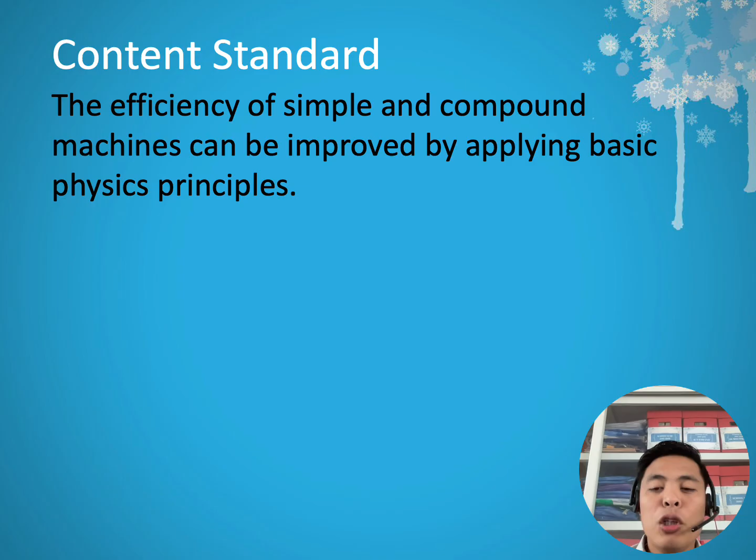This is the content standard of our discussion: the efficiency of simple and compound machines can be improved by applying basic physics principles. Our more technical or sophisticated machines come from the application of basic simple machines. The compound or complex machines we know now are all applications of simple machines.

This is our learning competency. We need to apply the concept of translational and rotational motion. We're still on this topic because simple machines or any other machines, whether complex or compound, have applications of translational and rotational motion. That's why they are working.

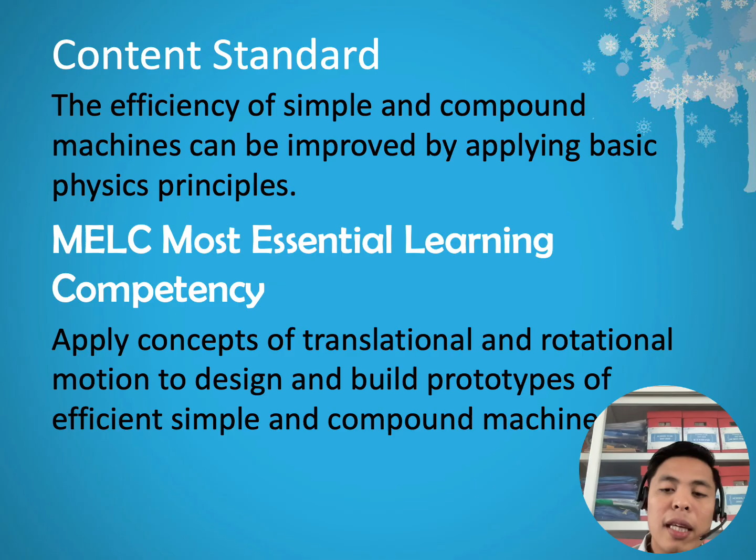These are built as prototypes of efficient simple and compound machines. The basis for making simple or compound machines is based on rotational and translational motions.

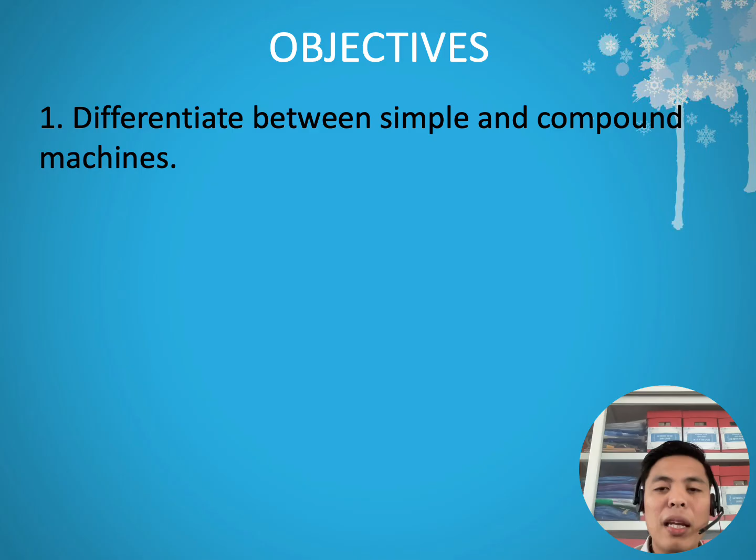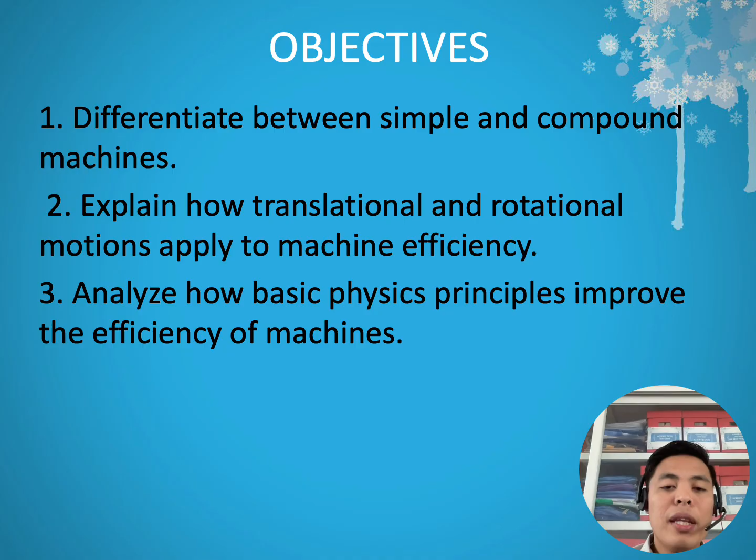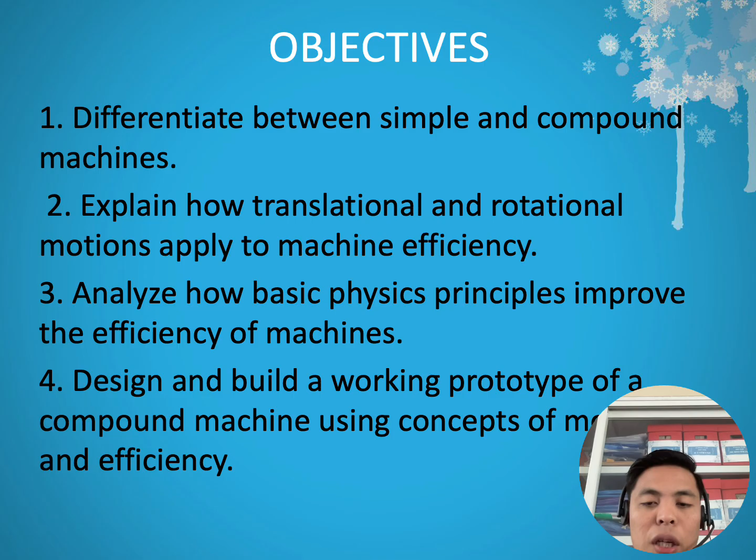For our lesson objectives, we will differentiate between simple and compound machines - what is the difference between these two? We also need to explain how translational and rotational motions apply to machine efficiency, and analyze how basic physics principles improve the efficiency of machines, and design and build a working prototype of a compound machine using the concept of machine and efficiency.

Let's proceed to the definitions of a machine, simple machines, and compound machines. A machine is a tool consisting of one or more parts that is constructed to achieve a particular goal. Take note of this - these are tools with one or more parts that help us do work more easily. So a machine is any equipment or device that helps make our work easier. Instead of using a large amount of force, a machine helps us save effort and time.

For example, we have a bicycle. A bicycle will help us travel faster than walking. That's why a bicycle is considered a compound machine.

A simple machine is a mechanical device that changes the direction or magnitude of a force. Take note, simple machines change the direction or size of a force. Simple machines have a simple design, but they help a lot in doing tasks or work. This doesn't reduce the total work, but it makes applying force easier. For example, we have the ramp, the lever, and the pulley.

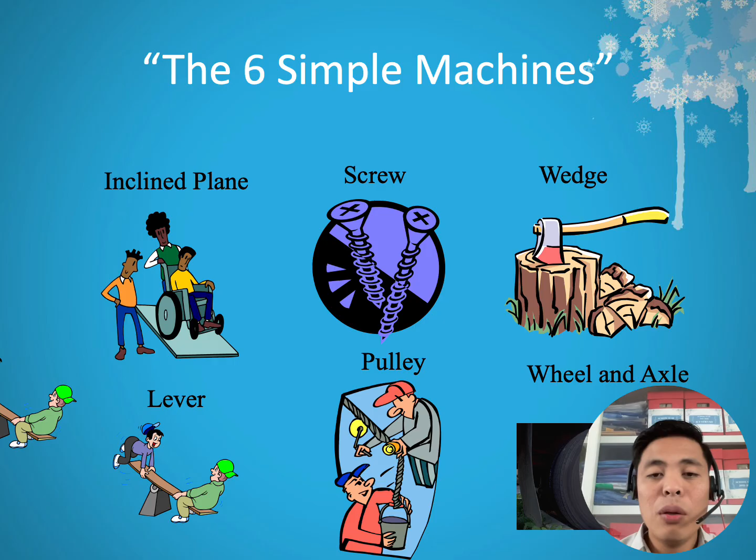Now, let's begin with the first one - we have the inclined plane. An inclined plane is a flat surface that is higher on one end. Take note, it's a flat surface but one side is higher - one end is elevated. An inclined plane makes the work of moving things easier.

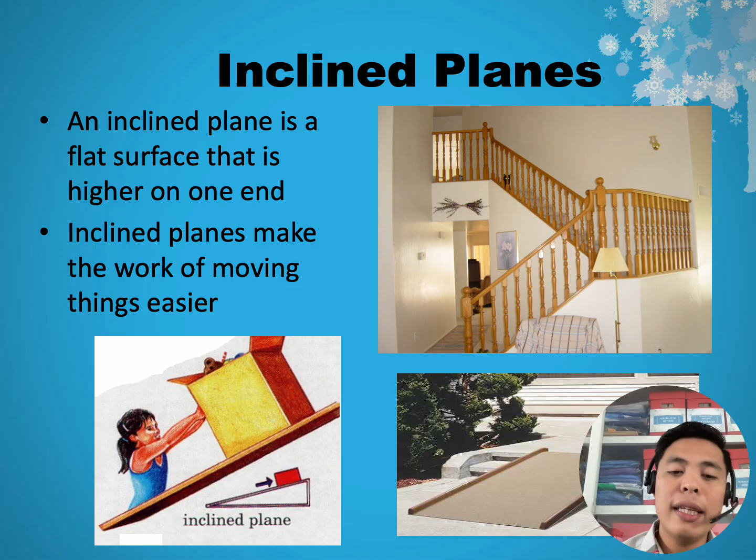So, screw naman, so a screw is a mechanism that converts rotational motion to linear motion. This is an application of rotational and translational motions, and a torque to a linear force. It is one of the six classical simple machines, and the most common form consists of a cylindrical shaft with helical grooves or ridges called threads around the outside.

Now, a screw is an inclined plane wrapped around a cylinder. So kapag iniikot natin ang screw, ang paikot na galaw o yung rotational motion ay nagiging tuwid na galaw, or you call it a linear motion.

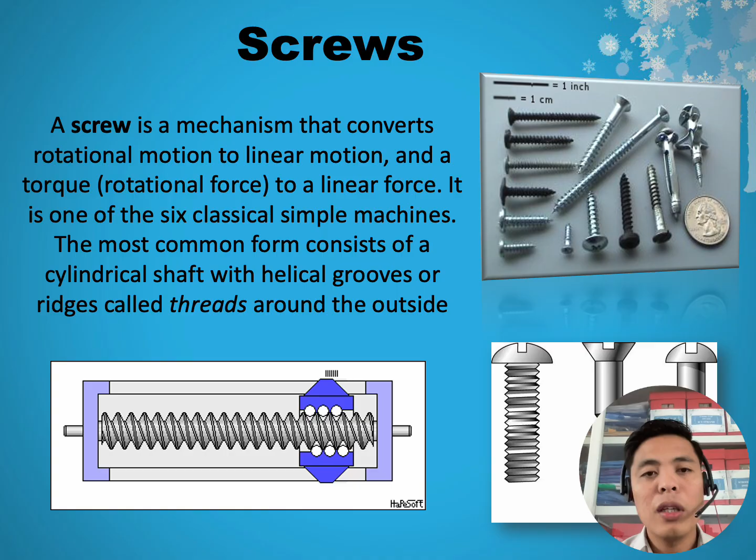For example natin yung light bulb, no? Na-try na natin siguro magpalit ng light bulb. Yung bottle cap, no? Magbubukas tayo ng mga soft drinks, di ba? Meron bottle cap doon, at saka yung mga wood screw. So yun ang mga example natin.

So take note of this. The tighter the threads, the easier it is to generate a strong force. Ibig sabihin, kapag mas maliit ang pagitan ng mga thread ng screw, mas malaki ang mechanical advantage. Ibig sabihin, mas madaling maipapasok ang screw kahit matigas ang material. So ang real life example natin dito, we have the wood screw sa furniture assembly. Kaya ito yung mga ginagamit.

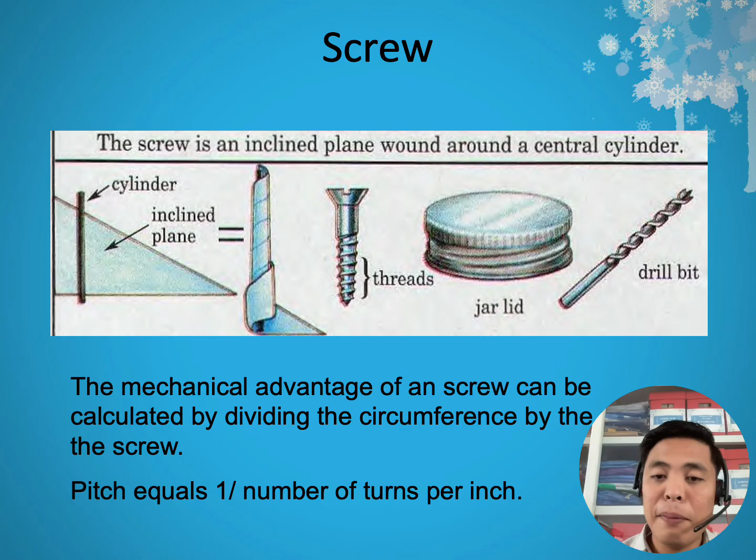Meron din tayong mga wedges or wedge. So, a wedge is what? Sabi dyan, is a triangular shape tool, and a compound and portable inclined plane, and one of the six classical simple machines, and it can be used to separate two objects or portion of an object, lift an object, or hold an object in place.

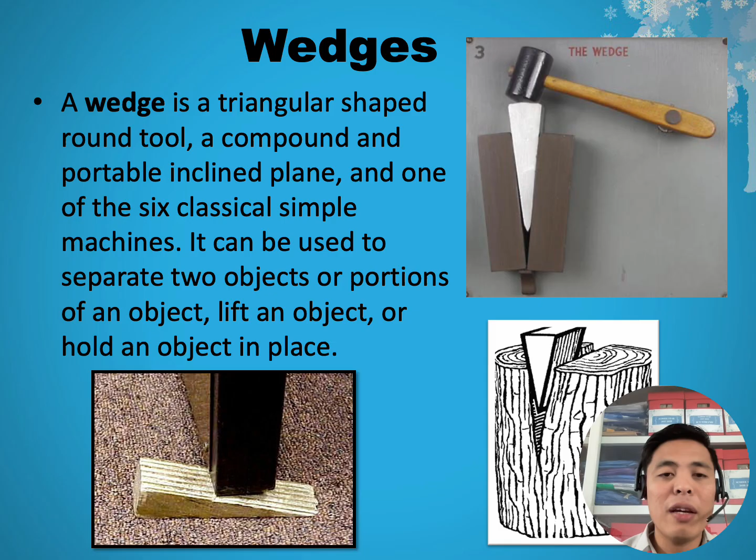Again, ang wedge ay made from two inclined planes joined together. Usually ginagamit ang wedge upang hatiin o kaya putulin o ihiwalay ang mga bagay. Kapag pinukpok ang wedge, ang pwersa ay napupunta doon sa magkabilang gilid. So, for example, yung knife. Ito mga example natin: pwedeng knife, pwedeng we have axe, pwedeng nail. So yun yung mga wedges.

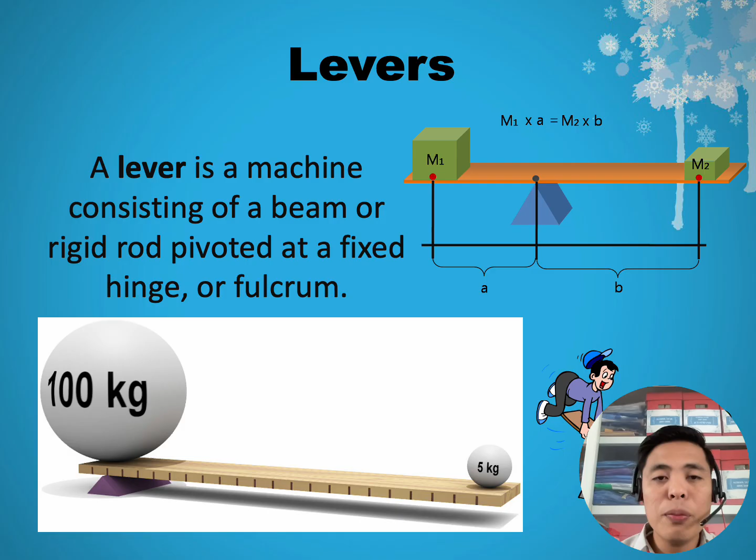Next, let's proceed to the lever. A lever is a machine consisting of a beam or a rigid rod pivoted at a fixed hinge or fulcrum. So ano bang itong lever? This is a rigid bar na rotates around a pivot. Yung pivot, tawag natin doon, is a fulcrum. Ang lever ay nagpaparami ng puwersa, technically upang mas madaling mabuhat o maigalaw ang isang bagay. So ang mga parts ng lever natin: meron tayong tinatawag na fulcrum, meron tayong effort, at meron tayong tinatawag na load.

Ngayon, pag-usapan natin yung mga iba't ibang levers. Levers are classified based on the position of the fulcrum, the effort, and the load. Di ba ito yung sinabi ko sa inyo kanina, na ang lever ay merong tatlong parts: meron siyang fulcrum, meron siyang effort, at meron siyang load. Nagkakaiba-iba lamang yung mga levers. So, there are different types of levers, nagkakaiba-iba lang sila based doon sa location ng fulcrum, ng load, at ng effort. Saan ba nakalagay? Saan ba yung location ng fulcrum? Saan, saan yung location ng load at ng effort?

So, ang arrangement natin dito is effort, fulcrum, and then load. Ito, nakikita nyo, we have the effort, merong load, at meron yung fulcrum. Nakikita nyo dito sa first class lever natin. So the fulcrum is between the effort and the load. Dito sa first class, which is the lever first class, in a first class lever, the fulcrum is in the middle and the load and the effort is on either side. So think of the seesaw. Again, ang position ng fulcrum is nandito sa gitna, yung effort at saka yung load parehas nasa gilid.

So tulad ng mga seesaw, may crowbar. Kapag tinulak mo ang isang side ng seesaw pababa, aangat ang kabilang side. So binabago nito yung direction ng puwersa. Meron din tayong another example dito, yung plies o pliers. These are an example of first class levers. Ang hinge ng pliers ay nagsisilbing fulcrum. Yung hinge nitong plies na to, ito ay nagiging fulcrum. Ang maliit na pwersa sa handle ay nagiging mas malaking pwersa sa dulo.

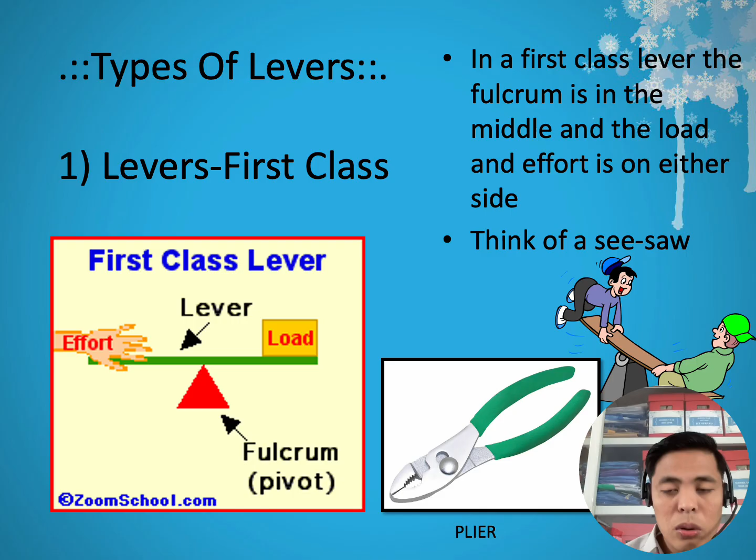Now let's proceed to the second lever class ng lever. So we have here, in the second class lever, the fulcrum is at the end with the load in the middle. So baliktad naman ito, ang load naman nasa gitna, ang fulcrum naman ay nasa dulo. So technically, we have the fulcrum, tapos load - nasa gitna yung load, at yung effort nasa dulo.

Ang example natin dito, ito yung mga example natin: the wheelbarrow, we have the nutcracker. Technically, yung second class lever, nag-iincrease siya ng force. Ito yung dahilan kung bakit kayang buhatin ng wheelbarrow ang mabibigat na karga gamit ang konting effort. Tulad nito, kahit mabibigat ito, you only exert less effort in order to lift these heavy materials. Yan yung ano, because of this principle ng second lever class. Again, ang fulcrum nasa dulo, ang load nasa gitna, yung effort nasa dulo din.

Let's proceed to the third class lever. In the third class lever, the fulcrum is again at the end, but the effort is in the middle. The load is at the end. So the order is fulcrum, then effort, then load. You can see it in the example here.

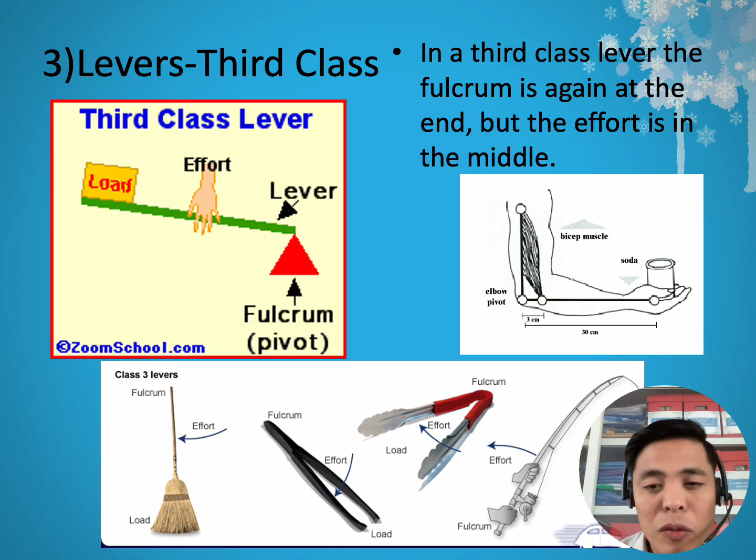What else? We have pulleys. A pulley is a wheel with a rope used to lift heavy loads. A pulley changes the direction of the force. So instead of lifting the load upward, you can pull it down using a rope.

Examples are flagpoles and elevators. A pulley is a wheel on an axle designed to support the movement of a cable or belt along its circumference. Pulleys are used in a variety of ways to lift loads, apply forces, and transmit power.

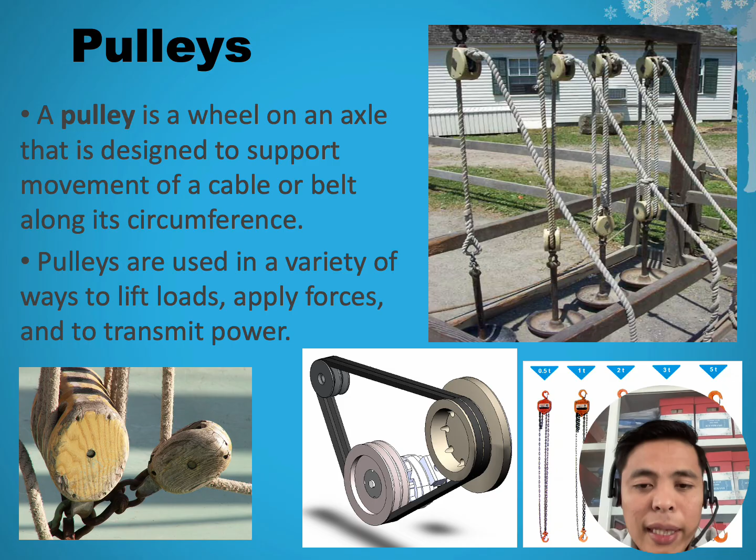We have the wheel and axle. A wheel and axle is generally considered to be the wheel attached to an axle so that these two parts rotate together, transferring force from one to another. When the large wheel is turned, the small axle also turns, creating a larger turning force or torque.

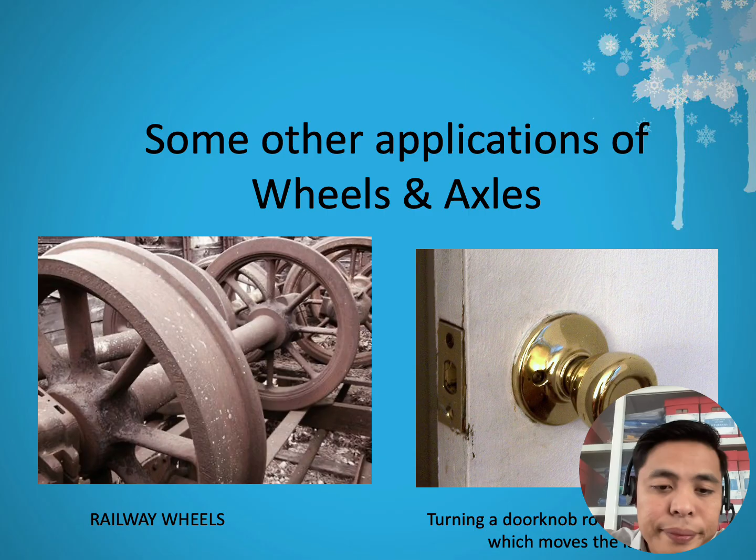Now let's move to compound machines. A compound machine is a combination of two or more simple machines. These simple machines can be put together in different ways to make complex machinery. Most of the things we use today are compound machines because they can perform more tasks.

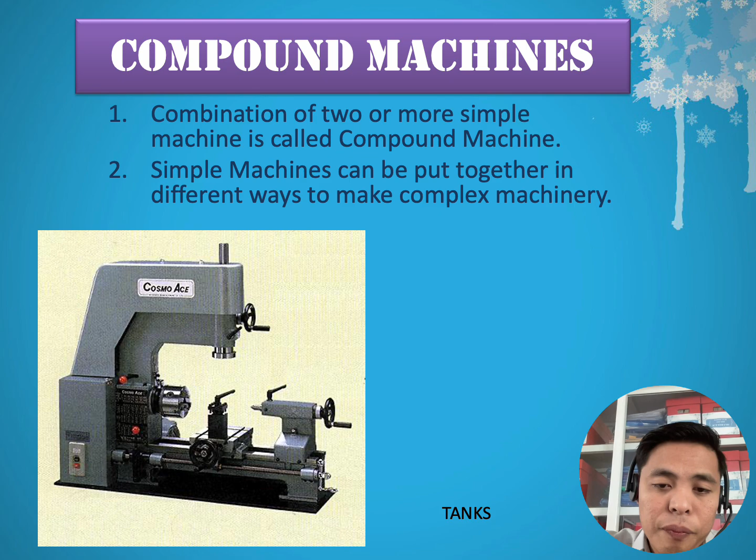What are examples of compound machines? We have bicycles, scissors, can openers, and also a tank.

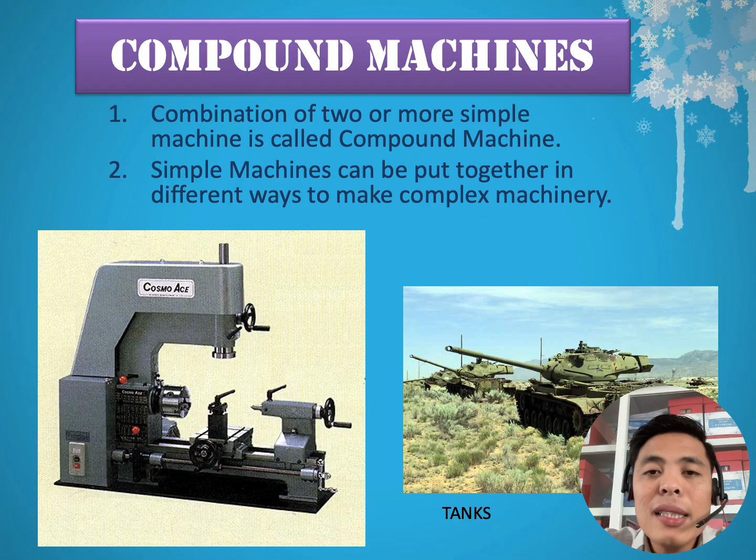A tank is actually a complex compound machine. It combines different simple machines such as wheels, axles, levers, gears, and pulleys so it can move and operate efficiently. In the tank, both translational and rotational motion occur simultaneously.

We also have the Mercedes V6 internal combustion engine. This engine converts chemical energy into mechanical energy.

When fuel is burned in this engine, the piston moves up and down, which is translational motion. The crankshaft then rotates, which is rotational motion. The purpose is to make the vehicle run, so there is a conversion of translational motion into rotational motion.

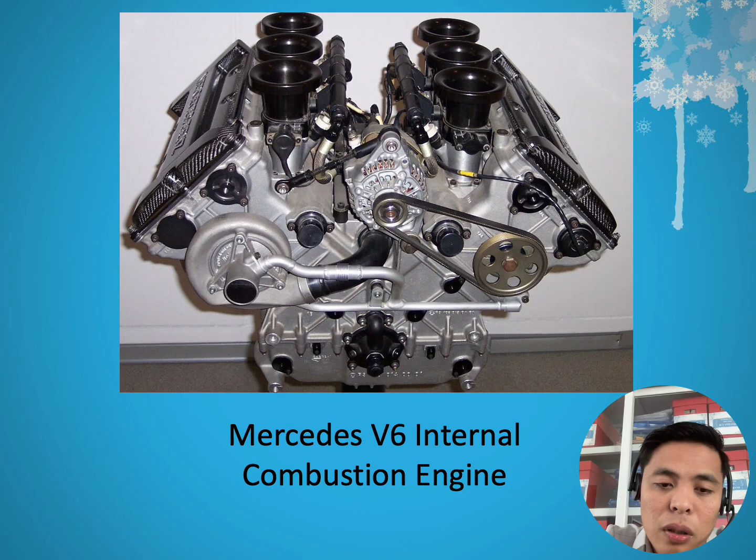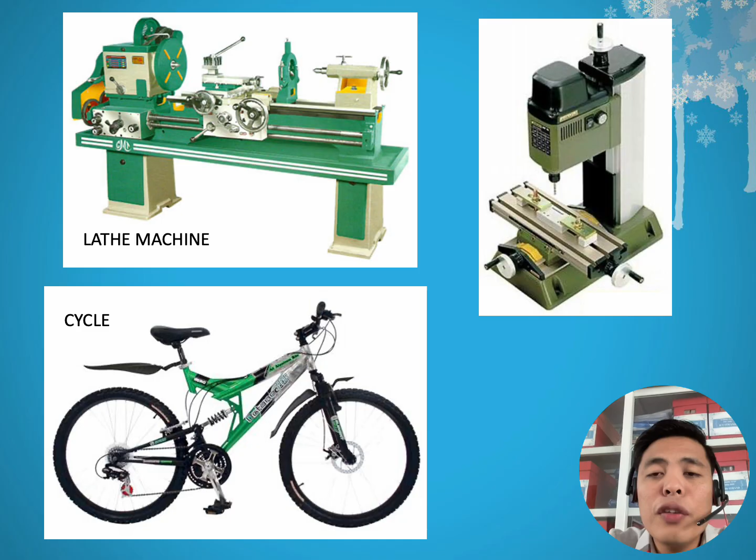A bicycle combines several simple machines, such as wheels and axles, levers like the brakes, gears, and the chain system. The rotational motion of the wheel becomes translational motion of the bicycle. That's all for now.